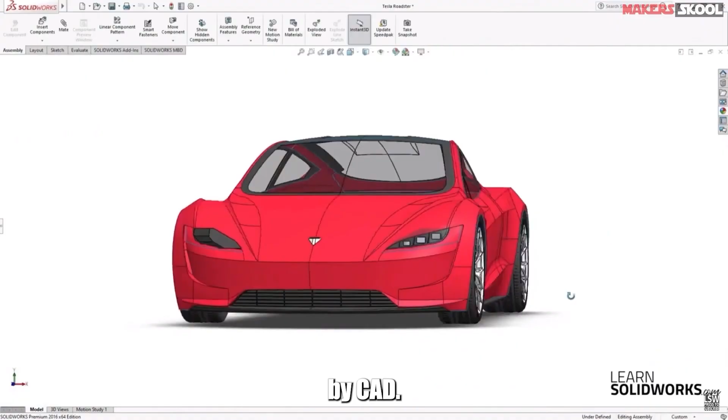But nowadays, for the last 40 years, all designs use CAD. Modern aircraft are designed by CAD. Modern cars are designed by CAD. iPhones are designed by CAD. All modern products are designed in CAD. All the products all around us are designed in CAD. So we still do design, but we have computers to help us, aid us.

So CAD is Computer Aided Design. Computers help us, aid us to create design or create any model that we can imagine. Who uses CAD?

Aerospace engineers use CAD. Aerospace engineering is about building things that fly through air or space. The use of CAD in the aerospace industry is vital for the successful creation of innovative airplane designs and functionalities. Using CAD, the airplane can be designed and tested on the computer to see how air will flow over the wings. The engineer can know how the plane will react to variables like ice, snow, or turbulence without endangering people.

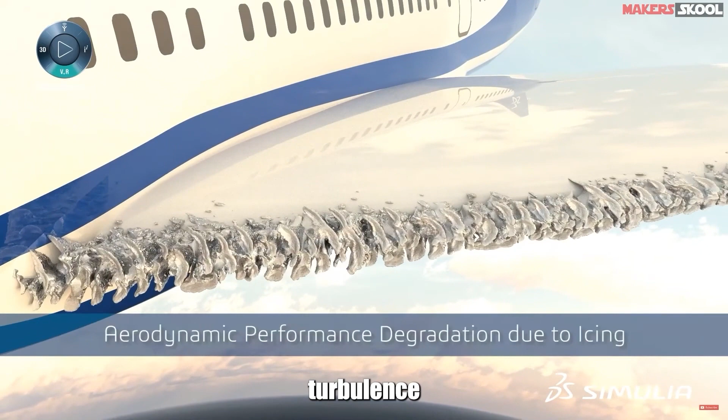CAD is used by NASA to design all components for the International Space Station and space flight. Structural engineers use CAD to see how strong buildings and bridges are. They can use it to test the strength of materials to see how strong it is before building something out of it. Biomedical engineers develop everything from life-saving ventilators to CAT scan machines to prosthetics or medical implants such as pacemakers.

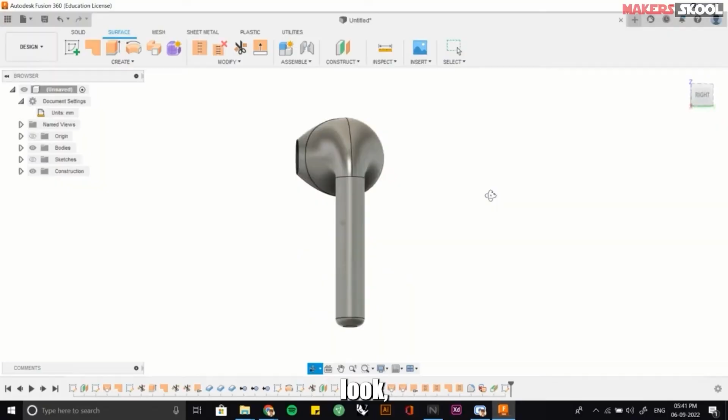Electrical engineers use CAD to design computer components, used in everything that has a computer in it such as phones, cars, refrigerators, TVs, and smart devices. Industrial designers use CAD to see how all our products look, feel, and interact with us. Furniture designers use CAD to create plans for kitchens, cabinets, chairs, tables, etc.

Interior designers use CAD to lay out the space of a building. They could show the owner different designs so they know what it is going to look like before committing to buying materials and furniture.

Architects use CAD to design buildings ranging from residential homes to shopping malls to huge skyscrapers.

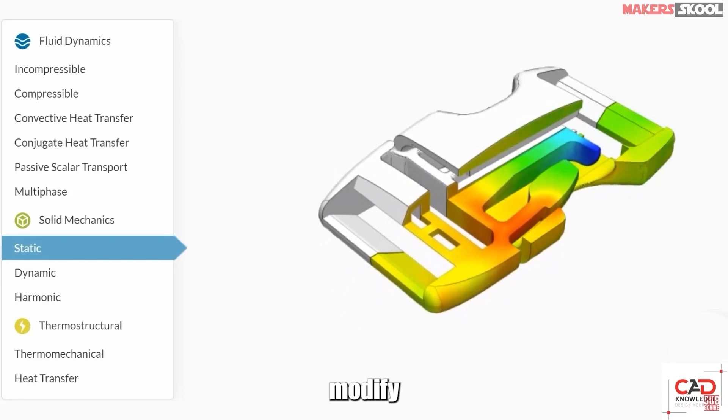Mechanical engineers use CAD to research, design, develop, and test mechanical devices. They can also make use of simulation to test everything from stress to vibration, getting the perfect output without having to create and modify real-world prototypes.

CAD has a wide variety of applications, from interior design to biomedical engineering to aerospace engineering, all using CAD. So then, when you design stuff, the next part is manufacturing. Manufacturing is making of things, it could be anything.

Fusion 360 can also do that. With CNC machining, laser cutting, and 3D printing, the design model can be turned into a real life product.

So let's understand what CAM is. CAM stands for Computer Aided Manufacturing. Similar to CAD, the computer helps us in the manufacturing side of things, meaning Fusion 360 can control manufacturing by controlling CNC, laser cutting, and 3D printing. So CAD focuses on design of a product, whereas CAM focuses on how to make it.

With the help of Fusion 360, you can create anything you want, whether you want to solve any normal household problem or create a product that changes the world. With Fusion 360 and 3D printing, you can turn your idea into reality.

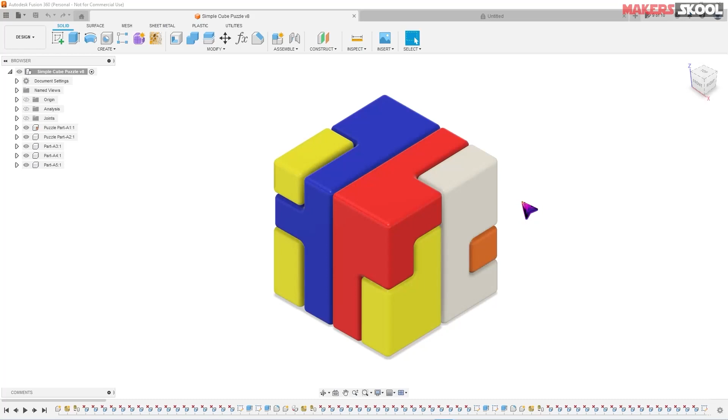Hi everyone, this is our first project that we are going to make. It's a simple puzzle cube. So before getting started, make sure that our settings are all the same.

For that, just right click on the top icon and click on preferences, then click on restore the default. In this course, we are using millimeter as our unit, but you can use any other unit you want. Then click OK. You can also change the unit by clicking the arrow beside document setting and then clicking this icon, which lets you change the unit if you want.

Hi, this is our first project, so let's start creating it. To create a new design or new project, you can click on the top right plus icon, or click on this icon and create a new design.

To create any 3D model, we first have to understand and master 2D drawing or 2D shapes. So what's a 2D drawing? Any drawing or shape that has only length and breadth is a 2D drawing. When we add height to a 2-dimensional drawing, it becomes a 3-dimensional shape.

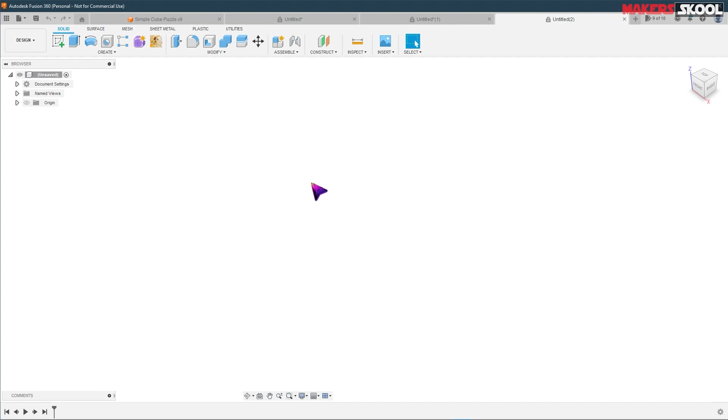In order to create a square, we have to create a sketch. To create a sketch, just click on the top left icon, and this will open up various planes where we can create the sketch. A sketch is basically where we draw 2D drawings. These are the various planes where we can draw them. This red line represents the x-axis, and this blue line represents the z-axis.

This cube is the view cube. You can rotate it around by holding down the left mouse button and clicking it around. The green line represents the y-axis. So the bottom plane represents the xy plane, this plane represents the xz plane, and this plane represents the zy plane. We can create a sketch in any of these planes.

So for starting out, let's choose the bottom plane.

This opens up the workspace to create the 2D drawing. As we've seen earlier, this line represents the x-axis and this line represents the y-axis, as you can see in the view cube, and this point represents the origin.

To create a square, just click on the 2-point rectangle button, then click anywhere and drag it around. Then we have created our first square, and click on finish sketch.

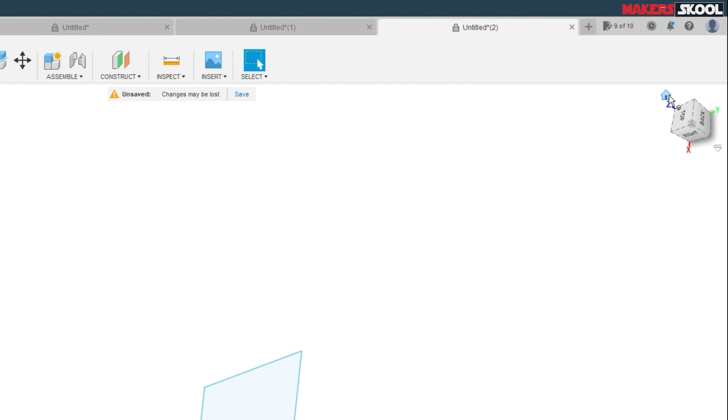To see the normal view, just click on the home button beside the view cube. And to zoom in and out, just scroll the middle mouse button of the mouse. You will be able to zoom in and out.

How do you think we will create a cube out of a square? As we have seen, we have to add height to the 2-dimensional drawing to create a 3-dimensional cube.

To create a height, we use a feature called extrude. Just click on it and then drag it up to create a positive height, and then click OK. The 2-dimensional square is being converted to a cube.

Now let's understand the basic navigation. As we've seen earlier, scroll the middle mouse button to zoom in and out, and hold down the middle mouse button to pan around the view. To rotate around the view, we can use the view cube, or click the shift button and then click the middle mouse button to rotate around the view.

When you zoom in or zoom out of the model, you can return to its normal view position by double clicking the middle mouse button.

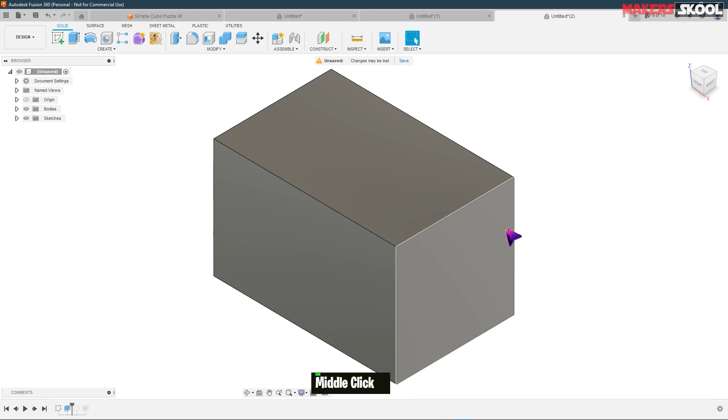Or when your model gets lost somewhere and you can't find it, you can find the model by double clicking the middle mouse button. There is another way to rotate around the model, by clicking on this orbit icon.

You can hold down the left mouse button to orbit around the model. You can get rid of the orbit icon by clicking the escape key on the keyboard.

You can also pan around by clicking on the hand icon and panning around, and you can get rid of the hand icon by right clicking the mouse button and clicking OK or cancel.

Let's move on to the next shape, for example a cylinder. So let's think in terms of its 2D shape. Yes, it's a circle. Similarly, we have to create a circle.

In a similar way, just click on the sketch button, create a sketch, and choose the bottom plane. Then choose the center circle, pick any point and drag it around, and then click on finish sketch.

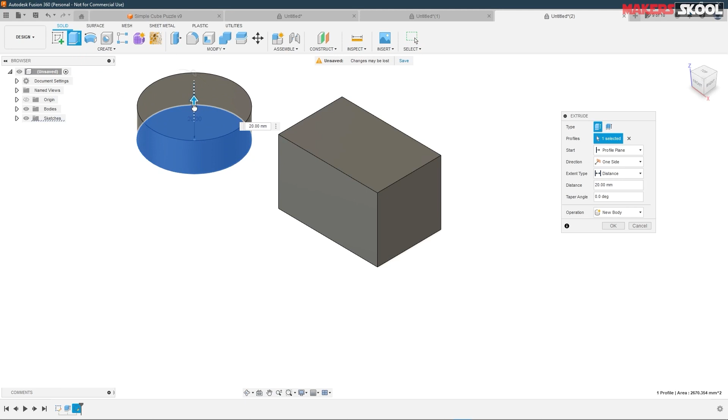In a similar way, we can add height to a circle to convert it to a cylinder. We use the extrude function again, and we can drag it up to add a positive height, or drag it down to add a negative height, as represented by the negative sign beside the number. Then click OK. We have created our cube and cylinder.

As we've seen earlier, we can create a sketch in any of the three planes. But a sketch can also be created on a flat face, any flat face on the cube or the cylinder. For example, let's take the top surface of the cube and click on it.

Now we are creating the sketch on top of the cube. Let's take a circle, click a point and drag it, and then click finish sketch.

Now you can extrude the circle on top of the cube. Just click on the extrude function, then click on the top circle sketch, drag it up, and click OK.

The sketch can be created on any flat face of the cube and the cylinder, but it can't be created on any curved surface. It can only be created on a flat face, not on the curved surface of the cylinder. This is the important concept.

So from the next video, we will start creating the first part of this cube puzzle.

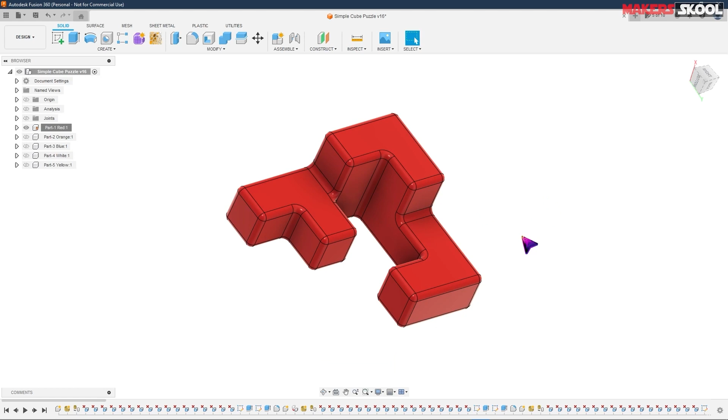It's a 2D drawing. First we are going to create this shape in the 2D sketch, and then extrude it till here. In the second part, we are going to create another sketch on top here, and extrude it here, as we are going to see next in the video.

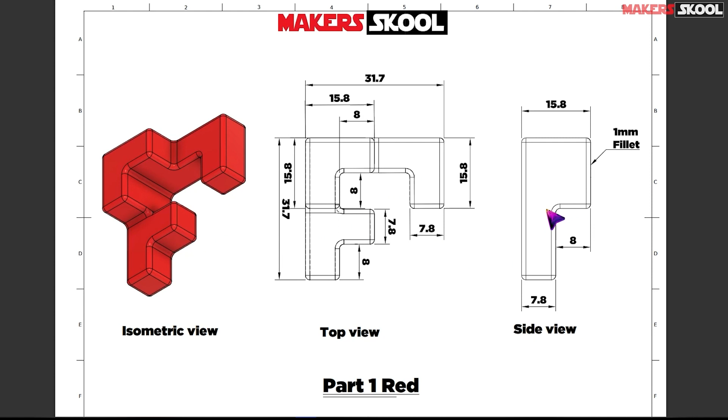This is the first red part that we are going to make. This is the drawing, the bottom sketch, and this is the side sketch that we are going to use. So let's start creating our design.

For that, click on new design, and before doing anything, first save the file. Just click on the save icon, and then give the name of the file. I am going to name it cube puzzle.

Then in location, choose the drop down icon, click on new project, and name it anything you want. I am going to name it Learning Fusion 360, then click enter, choose the new project we created, and inside that create a new folder named project 1. Then inside that we are going to save our cube puzzle and hit OK.

Now next we are going to create a new component. A new component is also known as a new part. As the cube puzzle consists of different parts - the red, yellow, orange and blue parts - these are different parts that make up our cube puzzle.

These parts are also known as components that we are going to use. For now, just click on new component. We will see components in detail in a future video. For now, name it part 1 red and hit OK. This will create the new part.

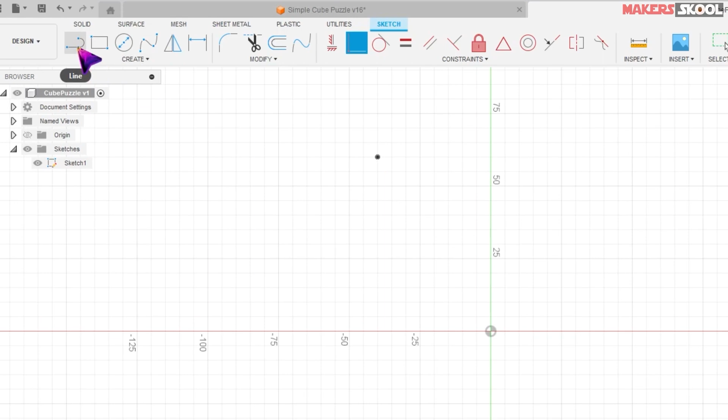Let's see some other examples. To create a line, click on the top left icon, the line icon, click once, drag it, and click again. You can continuously create another line, but we want a single line. To get rid of this, you can see this green tick icon - just click on it and it will get rid of that line.

Now we can use the coincidence constraint between this point and the line. If we apply the coincidence constraint between this point and the line, it will coincide with each other. Now it has coincided - the point has coincided with the line. If you want to get rid of the coincidence constraint, just click the escape key on the keyboard.

Now the point is coincident with the line. If you move the point, it will always be along the line. If you extend the line infinitely towards both sides, the point will always follow that line towards both sides. That is the coincidence constraint - it will follow along and coincide with this line.

In the same way, we can apply the coincidence constraint between two lines. We will create two lines - one line, click the green tick icon, then create another line and click on it. Now we can again use the coincidence constraint, this time between the point of a line and another line.

Just click on the point of a line and then click on another line. Now you can see that this line will follow that line along the line. If we extend this line towards both sides infinitely, then this line will always follow that line - it will always coincide with that line. This is the coincidence constraint.

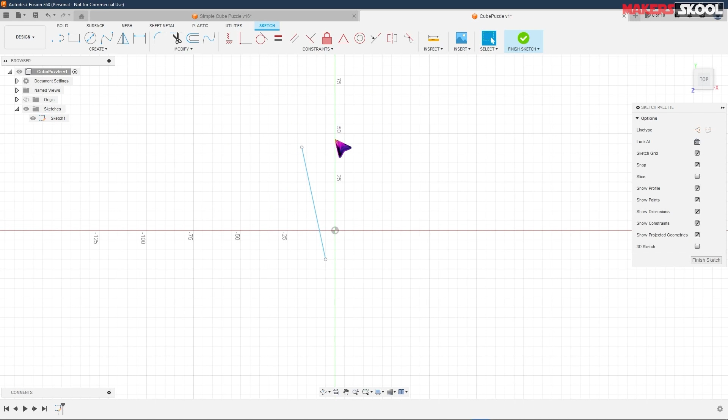Now you can see this line. You can rotate it around in 360 degrees, but we are using constraint to limit its movement. Constraint limits the movement of any shape, any line, any point, angle, or arc that we create - we have to restrict its movement. That's why we use constraint. So in this line we can rotate it in 360 degrees.

So if we want to restrict its movement along one axis, along the horizontal or the vertical axis, we can use the horizontal and vertical constraint. If we click on this icon and apply it horizontally, it will get horizontal and vertical constraint. Now you can't rotate it 360 degrees - the line has become restricted to the vertical axis.

In a similar way, if we align a line closer to the horizontal axis and apply a constraint to it, the line will become aligned to the horizontal axis. Now you can't rotate this line anymore. This is the horizontal and vertical constraint. If you want to know which constraint has been applied, you can click on this icon - here you can see it has used the horizontal constraint. Similarly, if you click on this other icon, you can check which constraint it has used - it has used a vertical constraint.

So let's move on to the next constraint, that is the perpendicular constraint. Similarly, we will create two lines. Now we can use the perpendicular constraint between these two lines. If you apply this perpendicular constraint between this line and this line, you can see this icon on both of them - that is the perpendicular sign, meaning both are perpendicular to each other.

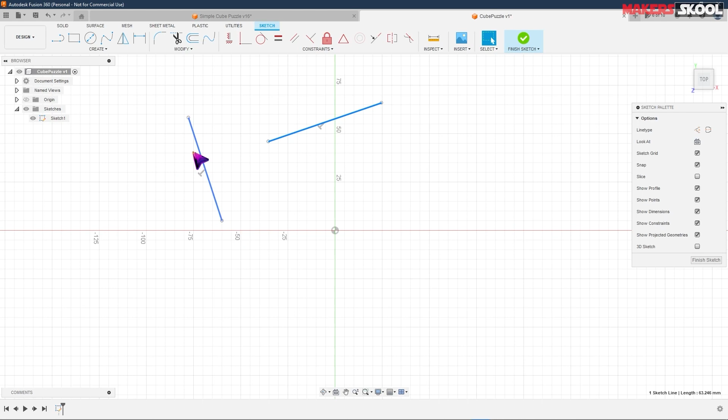That's the perpendicular constraint. If we want to align this line together, we can use the previous coincidence constraint, using the point and the line, then both points. Now you can easily see that both lines are perpendicular to each other. If we rotate it, it always remains perpendicular - this line and this line always remain perpendicular. That's the perpendicular constraint, meaning the angle between these two lines always remains 90 degrees.

You can check the perpendicular constraint by clicking on any of these two icons, and then you can check here which constraint it has used - it has used the perpendicular constraint.

So let's move on to the next constraint, that is the collinear constraint. Collinear constraint means if we create two lines, one line and another line, and we use a collinear constraint, then this line and this line will align themselves and become a single line, always following a single line, aligned in a single straight line.

Now that we've applied the collinear constraint, the line has aligned in a particular direction, becoming the same line. If we create another line and use a collinear constraint, meaning both lines - if we want this line to align with this line - we can use the collinear constraint. Just by clicking on one line and then another line, this third line has become collinear, meaning it follows the same straight line. This is the collinear constraint.

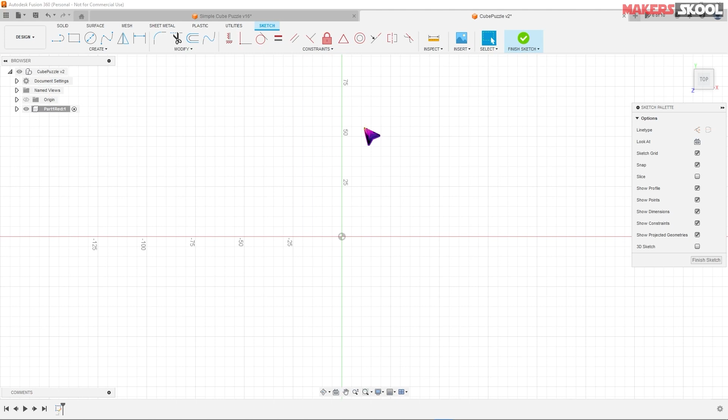So let's start creating our main sketch that we discussed, the part 1 red sketch. Open up that PDF - as you can see, this is the sketch we are going to use. We will create the basic structure of this sketch in the first part. This is the top view. So to create the sketch, just click on the line tool and create the basic structure of that part.

It can be a rough sketch. Now moving on, before using the dimension tool, we first have to use the constraint tool, so this line we can use the horizontal and vertical constraint on it.

As you can see, Fusion 360 has automatically allocated the different constraints - the perpendicular constraint, the vertical constraint, and the horizontal constraint. We don't have to use the perpendicular constraint now.

This line and this line are along the same line, so we can use the collinear constraint here, by clicking on this line and then clicking this line. Now you can see both lines will follow along - we have used the collinear constraint.

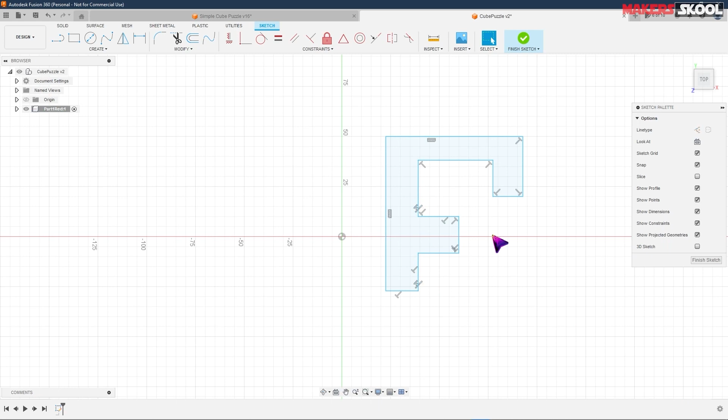If you click on this icon, it will show the collinear constraint. And if you want to get rid of any constraint that you don't want, click on the constraint icon and then click delete. Then you'll be able to get rid of that icon.

So we want that, so we can undo that using basic Control Z to undo things. Now we've basically used all the constraints that we can use. Now we can use another function, that is dimension, to dimension each and every line.

Now you can open up the PDF. We can use this dimension tool given here to dimension our sketch. These are all in millimeters. So we use the dimension constraint to dimension this line - this is 31.7, and then hit enter.

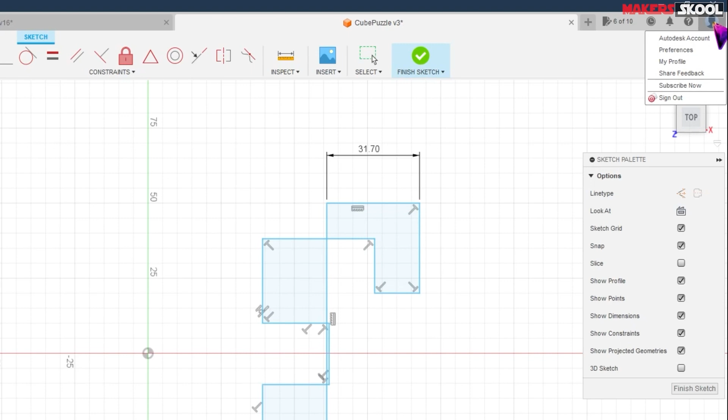But you can see that the shape has been distorted and the shape can't resize. For that we have to change some setting here. Click on the top right icon and then click on preferences.

Inside preferences, go to general, and in design you will see a setting for 'scale entire sketch at first dimension'. Click on that, then click apply, then OK, and then undo this step where we gave the dimension, and click delete this.

Now use the dimension sketch again, enter 31.7, and hit enter. Now you can see the entire sketch has been resized according to this dimension. That was the setting we changed.

Now you can give dimension to each and every length. Now we can use another constraint, the equal constraint, to constrain this sketch. We know that this length and this length are equal, so we can use the equal constraint on them. Now we don't have to dimension this length.

In the same way, this and this are all equal, so we can use the equal constraint here also between this and this length. Now these three have become equal. Similarly, we can use the equal constraint between this and this length.

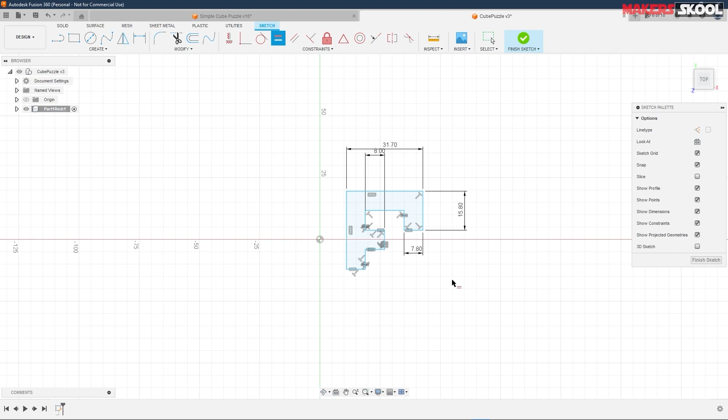This length is 8. These are all also equal - this length and this length are equal. Now we have to dimension only one part, this one. This and this length are also equal.

So here we can use the coincidence constraint between this point and the origin. Now you can see the color of the sketch has changed - now it's black. This indicates that we have fully defined the sketch, or fully constrained the sketch.

You can see by the lock icon beside the sketch that it has been fully defined. Now you can't move any of these points. This all indicates that the sketch has been fully defined - that's our aim.

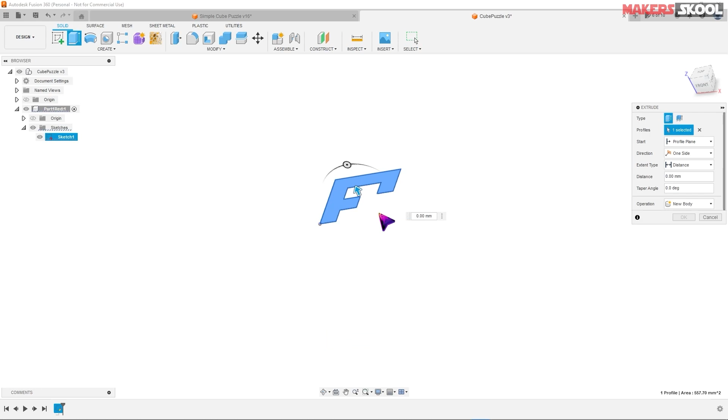That we have constrained, then click on finish sketch. Now rotate this icon and we have to extrude this sketch by clicking on this extrude icon, or just clicking on the plane and then right clicking and clicking on the extrude button.

What is the dimension of the extrude? You can check it from here. This is the length, 7.8. We have to extrude, then enter 7.8 and hit enter. So we have created the bottom part.

This part we have created. Now the next part left to create is the top part, so we have to create the sketch for that, on top here. So open up this sketch. To create this top part, we have to create this sketch.

So we have to create the rough sketch first, on top of here. Select the top face, then right click and select create sketch. Now we have to create the rough sketch that we have seen. To create the sketch, just click on the line tool, click on one point, and create the rough sketch.

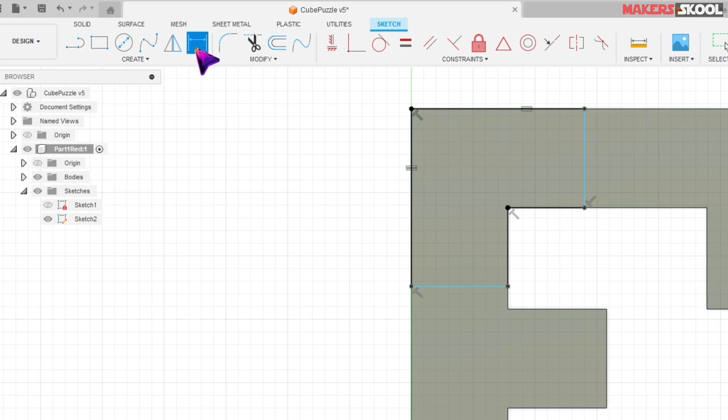Now the next part is to use the sketch dimension. So we will dimension the top length, which is 15.8, and then hit enter.

Now you can see again that the sketch has turned, all the lines have turned black. This shows that the sketch is fully constrained, as you can see from the lock icon. If you delete this dimension, now you can see the lock icon has gone, which indicates the sketch is not fully constrained. So the lock icon indicates the sketch is fully constrained, and that's what we want. Then click on finish sketch. Now go to the normal view by clicking the home icon.

Now we have to extrude it. Click on the sketch, then right click and click on extrude. Extrude it up to see what the extrude value should be, which is 8mm, give it 8mm and hit OK. Now you can see the part we have created. This part we have already created.

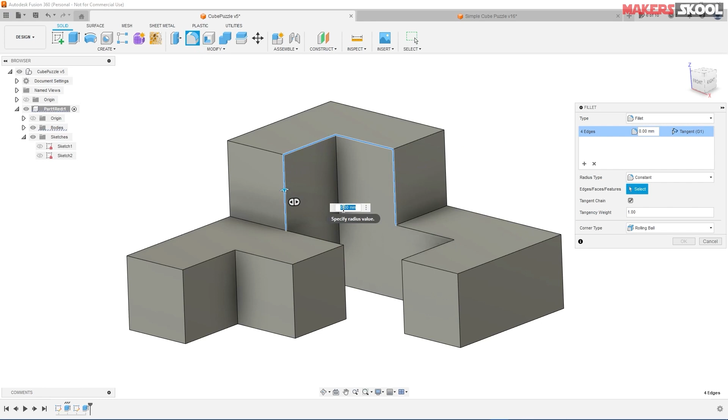Now the only thing left is to round off the edges. To round off the edges, we will use a tool known as fillet. If you click the edges, multiple edges, and give it, for example, 1mm of fillet, it will round off the selected edges. But in this part, each and every edge has to be selected individually to round off. So we can do the fillet again by clicking individual edges, or there is a shortcut we can use. We can undo this fillet with Ctrl+Z.

To select every edge, go to the top icon, select, and go to the selection filter, make sure select through is ticked, deselect select all, and then select body edges. Now hold down the left mouse button and drag it, making sure the square covers the whole body, then let it go. Now you can see every edge of the body has been selected.

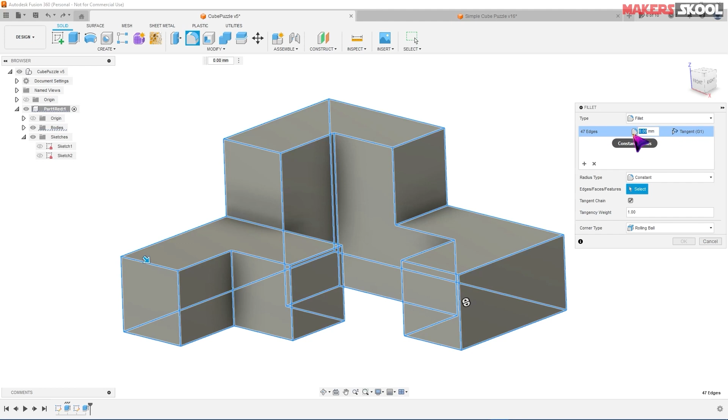Now we can go back to the fillet. You can see that all 47 edges of the body have been selected. Now we have to give the fillet of 1mm, and then click OK.

Now we have created our first part. The only thing left is to color it red. To color it, select part 1, right click on it, and go to the Appearance option.

This opens up the Appearance dialog box. Go to the library section, and inside library select the plastic folder. Inside plastic we can see different types of plastic, but here we use ABS white plastic. Click on it and drag it over the part, and now you can see the color of the part has changed.

Now we want the red color, so to change the color, go to the ABS white icon, right click on it, and click Edit. You can drag this to change it to red, and then click Done.

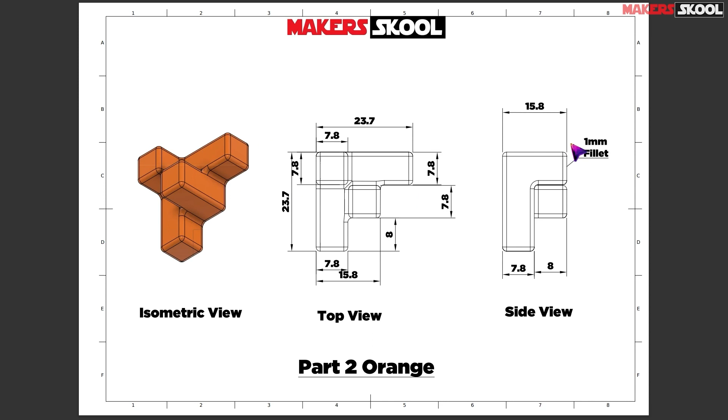Now we have created our first part. The next thing I want you to do is make part 2 orange and part 3 blue, using the sketch and the same concept discussed earlier. I'll give you some hints: start with the sketch, extrude it up, create another sketch on top, extrude it again, and add the fillet. In similar fashion you can create the blue part also. These are easy, you can do it.

Before moving forward, remember we selected the selection filter earlier. Make sure we select all again.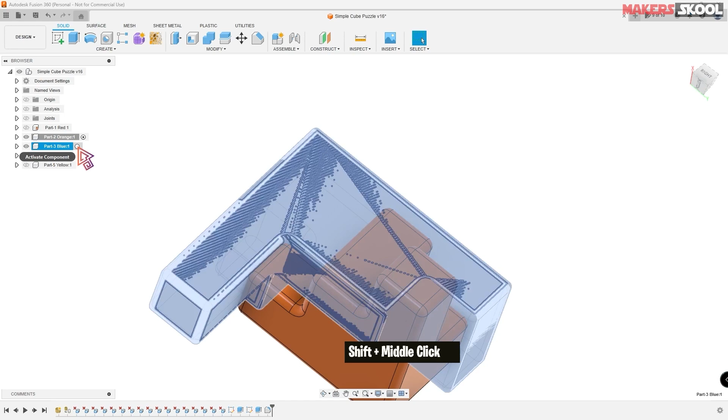In the previous video we created part 1 red, and I gave you the task to create part 2 orange and part 3 blue. Hope you tried to make it yourself. For those who got stuck, I'll give the solution for part 3 blue, and I recommend even those who completed part 2 and 3 to watch this video, as new concepts will be given here.

To create part 3 blue, open up the cube puzzle we created in the last video. Click the show data panel icon, go to the home icon, and inside all project files you'll see the Learning Fusion 360 file. Double click to open it, click on project 1, then double click on the cube puzzle to open it. To create part 3 blue, click on new component and name it part 3 blue.

Hit enter. Now you can see the new component has been created with the name part 3 blue, and this is the previous part 1 red we created. To hide part 1 red, just click on the eye icon.

Let's start by creating the bottom sketch. Click on create sketch and choose the bottom plane. Then open up the PDF drawing of part 3 blue. This is the bottom sketch of part 3 blue, so we try to make the rough sketch of this bottom plane.

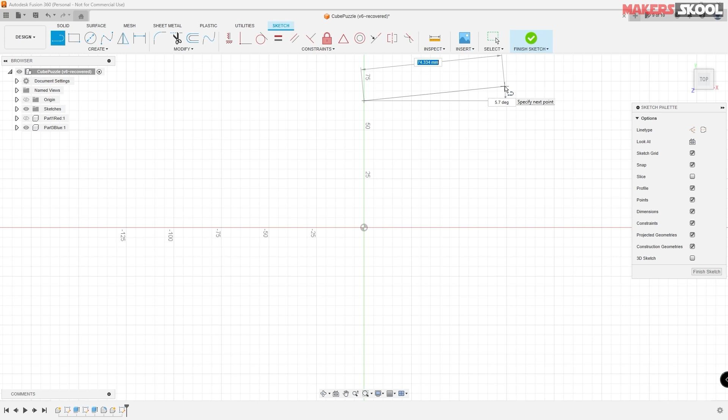Choose the line tool and create the line. If you try to make the line straight, you can see by the blue sign indicated on the line that the horizontal constraint is being allocated to it. If you try to make it at any angle, the horizontal constraint is gone. In similar fashion, if you make the line straight at an angle to another line, you'll see a 90-degree angle being allocated. If you make it at any other angle, the 90-degree angle is gone.

If you try to make the line straight, you can see the perpendicular constraint is being allocated to it. In similar fashion, as we try to make lines straight, Fusion 360 will automatically allocate a constraint to that line.

So now we have created the rough sketch. To get rid of the line tool, just click the escape key on the keyboard, or click the right mouse button and select OK or cancel. There are two ways to cancel that out.

So now the next step is to fully define the sketch. That's our aim in the sketch workbench. What does it mean to fully define the sketch? As you can see, the sketch is now freely able to move in any direction. That we don't want. We want the sketch to be fixed so it can't move anymore. To achieve that, we use the constraint tool and the dimension tool to fully define the sketch.

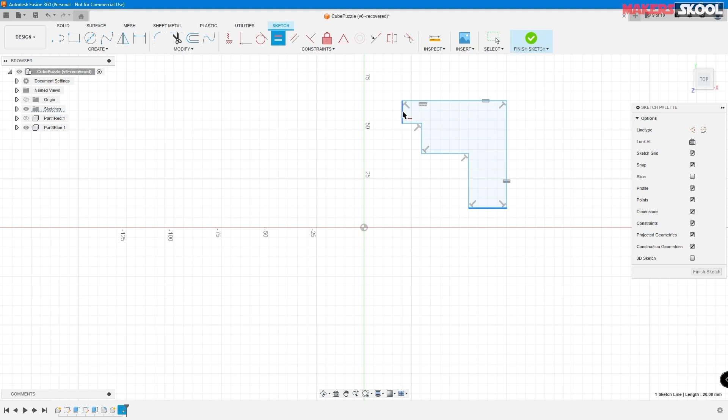So we will start by choosing the constraint tool. We can use the equal constraint here. As you can see, this length and this length are equal at 31.7. In similar fashion, this length and this length are equal, and this length too. So we use the equal constraint: this length and this length are equal, this length and this length are equal, this length and this length are equal. Then click escape.

Now we can't use any more constraints here. I think we have used all the constraints possible in this sketch. So we next move on to use the dimension tool.

So we dimension this length. What is that length? That length is 31.7. Enter that, then zoom in, and this length is 7.8. In similar fashion, this length is 15.9, and this length is 8.

When you try to make that length equal to 8, it shows that the sketch is over constrained. This means the sketch has already become 8 - you don't have to make it 8 again. You can see the sketch has already become 8 by the driven dimension. Then click on driven dimension and you can see the sketch length is 8. The driven dimension is for reference purpose only - it means this dimension is not driving the sketch, it's just measuring this length, shown by the bracket inside the 8.

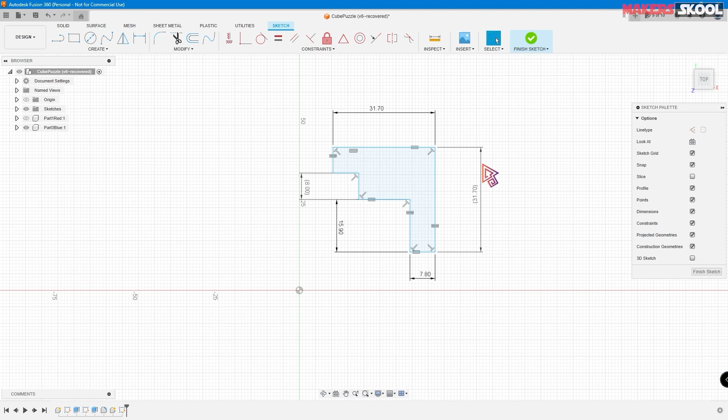Now when you try to move the sketch, you can see it's still movable, so we have to fix that. We have to fix this movement with respect to the origin. So we can use the coincident constraint between this point and this point. As you can see, the sketch has now turned black - that's our aim, to make the sketch fully constrained. Now the sketch can no longer move at any point.

That's what I was talking about. So why do we need to fully define the sketch? If we don't fully define it, and try to make changes in the future, it might break the model or throw off the sketch. So we need to fully define the sketch, so in the future we can easily make changes to the sketch or model without breaking it or throwing it off.

Then click finish sketch, then click the home button. Now we have created the 2D sketch. How do we create a 3D shape out of the 2D plane? We have to extrude it out, extruding it up. What is the length? 8.

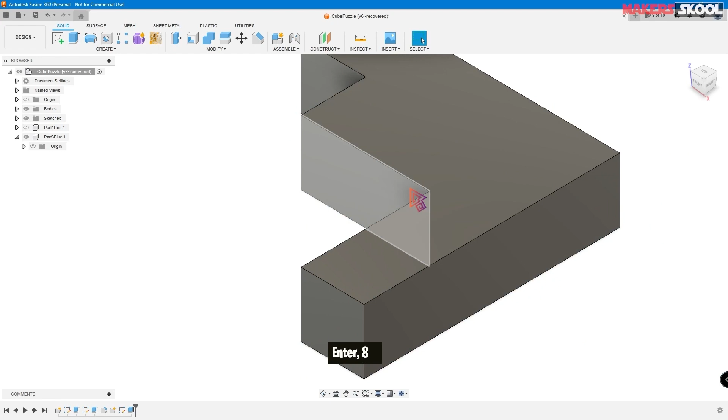So now we have created the bottom part. Next we have to create the top part, this top part. So this is the sketch of this top part - we have to create this rough sketch first. To create the sketch, we need the top surface here.

Just right click on it and click create a sketch, then choose the line tool again. We try to start the line from this point. You can see that when you move the cursor near the point, Fusion 360 tries to snap it to that point. In similar fashion, it snaps to that end point. Then we can create that rough line.

So we can create another line in similar fashion - it snaps to this point, and then again. To get rid of the line tool, just click the escape key.

So now we have to use the constraint first. We can use the equal constraint between these two lengths as they are equal.

As you can see the squares are already turned black. So we will choose to dimension this length.

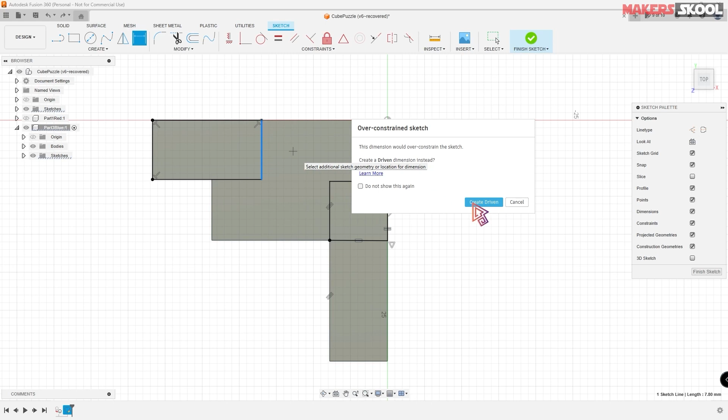Again the sketch is showing that this length is already defined, so we don't have to define it, as shown by the sketch being over constrained. You can check it out by clicking on create driven dimension. So we don't have to define this length as 7.8, as it's already been defined.

We only need to define this length, which is 15.9. So we have fully defined these two lengths, and now we can click Finish Sketch.

Now the next part is similar. Just click on the extrude tool and then click the extrude button. Here you can choose multiple extrude profiles all at once, so choose extrude profile 1 and the second. Both are selected, and then we can drag it up and add the length of 8.

And then hit enter. Now we have created our part 3 blue. Only thing left is to round off the edges, which is done using the same tool we used earlier, the fillet tool.

If by mistake you select any faces, you can click on the remove select icon. To select each and every edge, go to the selection filter, unselect select all, and then only select body edges. This means we are trying to select only the edges of the body, and the select tool will try to select all the edges.

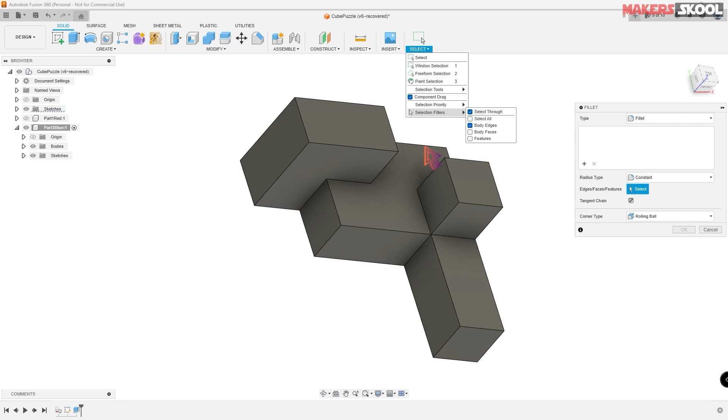Then click on one side and drag so that the complete body is covered. Now you can see that every edge has been selected, and we can add a fillet of 1 millimeter and then hit enter.

Now we have created the part. The only thing left is to add some appearance. Just right click on part 3 blue and then click on appearance.

We can go in a similar fashion. We will go to plastic, then go to ABS white, and you can download it. You can see this is the download icon. Download this ABS plastic and then right click on it and click add to favorite.

So when we use the ABS white plastic later on, it can easily be accessed from the favorite tool. Drag it over the tool, then right click on it, click edit, and change the color to blue, then click done.

Close that and then hit the save button, and then click OK.

So the next thing is creating part 2 orange. The first thing is to create a component, but before creating the component, make sure the cube puzzle is selected. Now click on new component and name it part 2 orange, then hit enter.

Now click on create sketch, choose the bottom plane, and hide part 3 by clicking the eye icon. Then open up the part 2 orange sketch and create the basic sketch of part 2 orange.

Choose the line, then click the escape key. Now use the constraint, the horizontal vertical constraint, and then use the equal constraint.

You can see this length and this length are equal, and this length and this length are equal. So we can make these lengths equal. Now you can see this length is 8, and this length is also 8, so both are equal. When you calculate the length of the bottom sketch, total is 15.8. Subtract 7.8, you get 8, and similarly 8 here. That means this length, this length, and this length are all equal.

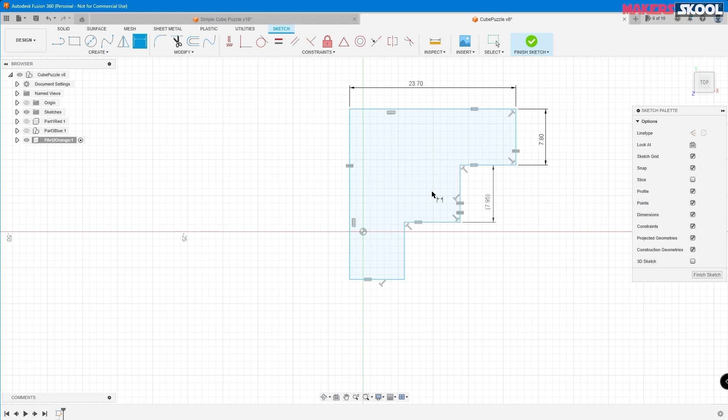Now you can click on escape key. Now you can't able to select because we have made the selection filter, but we have not made the selection filter to all, that's why we couldn't select before. Now we can select easily, and now we can move it.

Similarly, we can make this and this point a coincident constraint, or we can directly move the point over the origin, and it will automatically add the coincident constraint. Now the sketch has turned black. Now we can click on finish sketch and then click on home, and extrude the plane, which is 7.8.

Now the next thing is creating this top sketch. We will right click on it, then click on create sketch, choose the line tool again, and create a basic rough sketch, similarly over here.

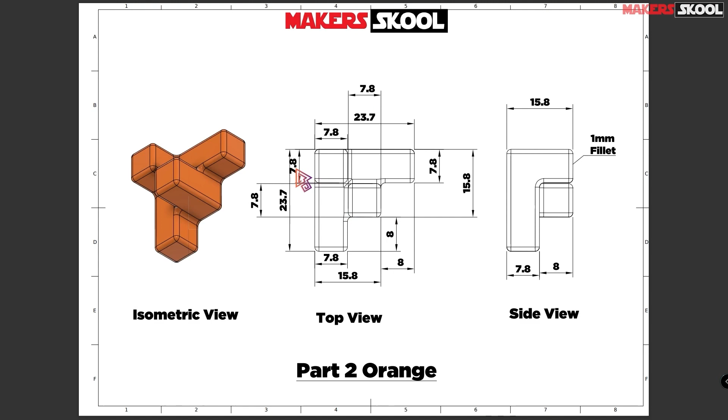Now next we can use the equal constraint. We can see that the top length of the sketch is 7.8, and this is also 7.8, meaning both lengths are equal. Similarly, this and this length are equal, so we can make this and this length equal, and this length equal.

Now the next thing is adding the dimension, which is 7.8, and this is also 7.8. Now we have fully constrained the sketch.

Now next is finish sketch, and similarly we will extrude it. Select the first profile and then select the next profile and extrude it till it, making sure that the operation is join, and then click on OK.

Now the next thing is adding the fillet. So we can again move to the selection tool, then the filter, deselect the select all, and select the body edges, select all body edges, then go to the fillet and add 1 mm of fillet, and click on OK.

Now the next thing is appearance. Right click on the part 2 orange and then click on appearance. Since the pop-up hasn't come out visibly, but it is over here, you can go to the favorites and add ABS.

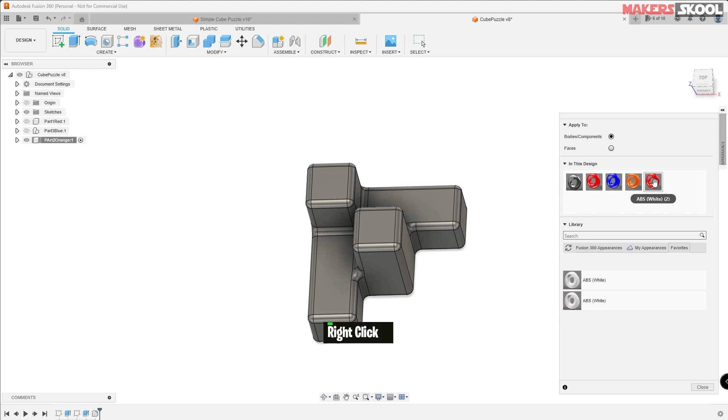You can click on any of the appearance and then click on duplicate. It will duplicate the same ABS file, and then you can click on the duplicate file and click on edit, and now you can change the color to orange, and then click on done. Now open the appearance again, drag the orange color over the part, and click on close. Now we have created the part 2 orange similarly, and then click on save the file.

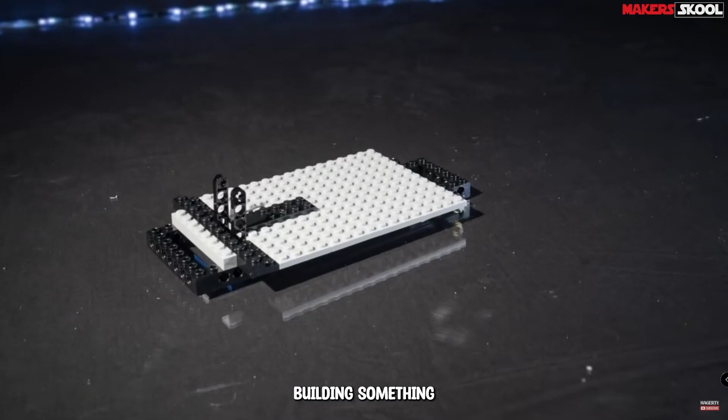What is 3D printing? 3D printing, also known as additive manufacturing, is a process of creating physical objects layer by layer using a special machine called a 3D printer. It's like building something with Lego bricks, but instead of assembling the pieces manually, the printer does it for you automatically. Here's how a 3D printer works in simple terms.

First is design. You start by creating a digital design of the object you want to print. This design is made using computer-aided design (CAD) software such as Fusion 360, or it can be downloaded from online resources, for example Thingiverse. Second is preparation.

The digital design is then sent to the slicer software, like Cura, which prepares it for printing. This involves dividing the design into very thin cross-sectional layers, like slicing a loaf of bread into many thin slices.

Third is printing. The 3D printer starts with the bottom layer and begins printing from the ground up. It does this by depositing or solidifying material such as plastic, metal, or resin layer by layer. Each layer sticks to the previous one, gradually building the object.

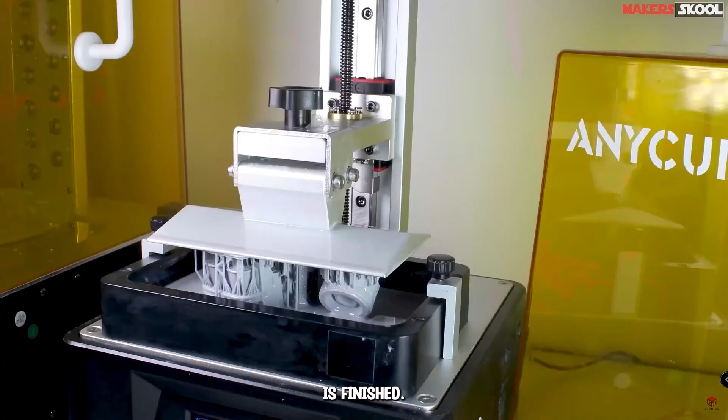Fourth is finishing. Once the printing is finished, you may need to remove any support structures that were used during the printing process. Depending on the material and design, you might also do some post-processing such as sanding or painting to give the object a polished and refined look.

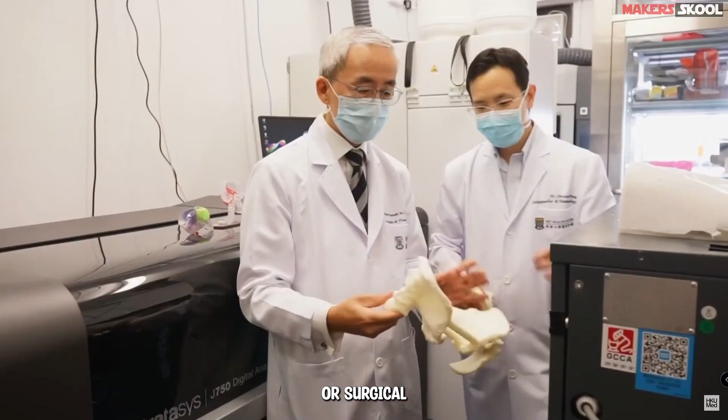Here are a few examples of where 3D printing is being used. Healthcare: 3D printing has made significant advancement in the field of healthcare. It is used to create patient-specific medical implants, prosthetics, and anatomical models for surgical planning. Surgeons can use 3D printed models to practice complex procedures and improve surgical outcomes.

Jewelry and fashion: designers and fashion enthusiasts leverage 3D printing to create intricate and personalized jewelry pieces, accessories, and even clothing. It offers the flexibility to design complex geometries and unique patterns that are challenging to achieve through traditional manufacturing methods. Art and design.

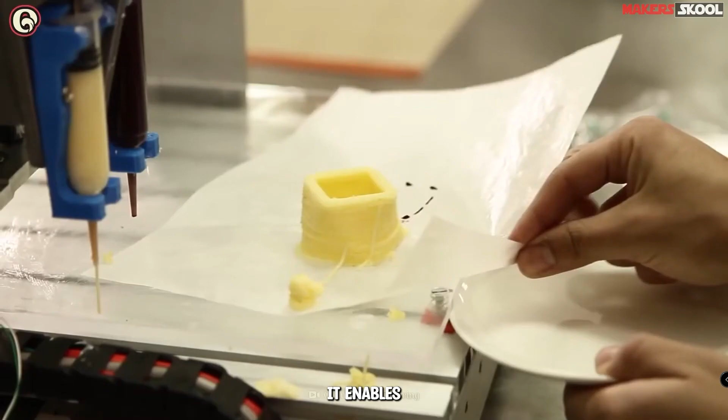Artists and designers explore 3D printing as a medium for creating unique and intricate sculptures and decorative pieces. It provides a new level of freedom and complexity in realizing artistic vision. Food industry: 3D printing is emerging as a technology in the food industry. It enables the creation of visually appealing and customizable food items such as chocolates, cakes, and confections.

Chefs and culinary artists can experiment with different shapes and textures, bringing innovation to the culinary world.

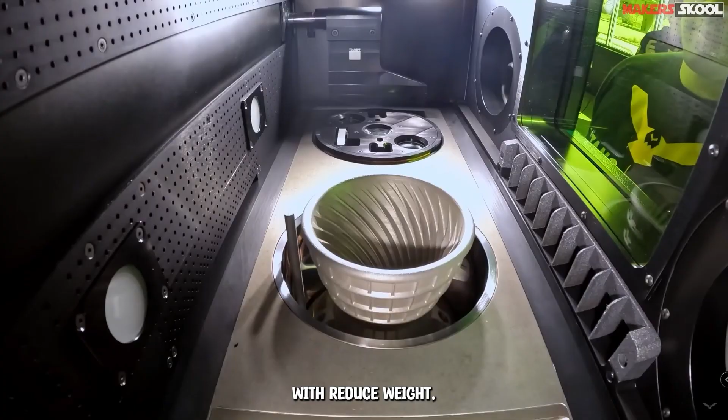Aerospace and defense industries use 3D printing to manufacture lightweight and complex components for aircraft, satellites, and missiles. This technology enables the production of intricate parts with reduced weight, improving fuel efficiency and performance.

Architects and construction professionals use 3D printing to create detailed architectural models, showcasing design concepts and helping clients visualize projects before construction. Additionally, 3D printing can be used to fabricate building components and intricate structures.

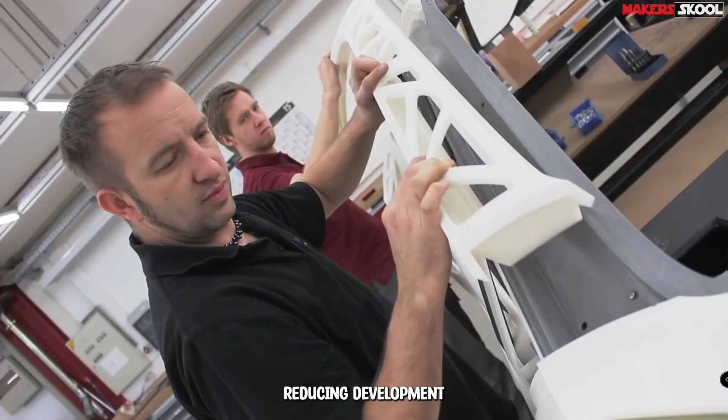In automotive industries, 3D printing is used for rapid prototyping of cars, parts, and components. It allows for faster design iteration and customization, reducing development time and costs. Some manufacturers are even exploring the use of 3D printing for creating end-use parts in production vehicles.

3D printing allows for great versatility and customization. You can create a wide range of objects, from simple toys and jewelries to complex prototypes and functional parts. It has revolutionized industries like manufacturing, healthcare, architecture, and more, enabling faster production, cost-effective prototyping, and the ability to make one-of-a-kind creations. Overall, 3D printing offers an exciting way to bring imagination to life, turning digital designs into physical objects with the help of a 3D printer.

In the previous video, we created part 1, part 2, and part 3. So the next thing is 3D printing this part. For this, we need to download slicing software that will make the part ready for 3D printing.

There are many different types of slicing software out there, like Ultimaker Cura, Prusa Slicer, or Simplify 3D. But in this course, we are using a free and open source slicing software, Ultimaker Cura. If you are using any other software, the concepts taught in Ultimaker Cura can be applied to any slicing software.

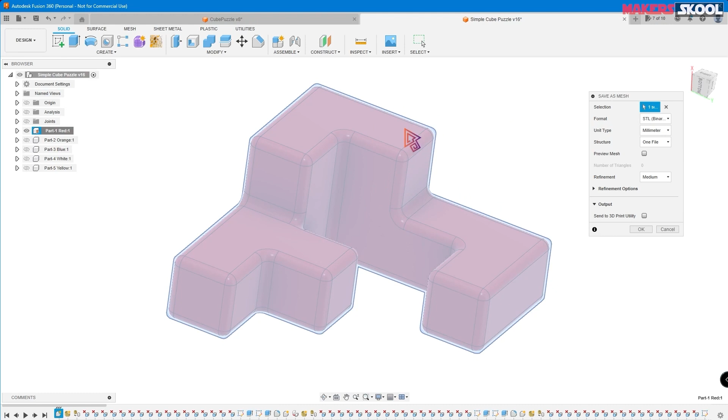So the next part is sending the 3D model for 3D printing. For that, right click on the part 1 red icon and click on save as mesh. This will save the 3D model as STL format, which is acceptable by the slicing software for 3D printing. Then click OK.

Then click on save to my computer. Click on here, then choose the folder where you want to save the STL file format. Name the part you want to save. In my case, I am saving it as part1 red dot stl, then click on save. Now click on save again. This will save the file on your computer as an STL file format.

Or you can directly send the part to the Cura slicer without needing to open the software. For example, take part 2 orange, right click on it, and click on save as mesh. Select the send to 3D print utility and then click on Cura.

If you have installed the Cura software to its default location, select that. If you have installed it at a custom location other than default, click on custom, then click on the folder, select from my computer, and choose the location where you installed the Cura software, then click open. In my case, I installed Cura to its default location, so I select Cura directly from here and click OK. This will open part 2 orange directly in Cura.

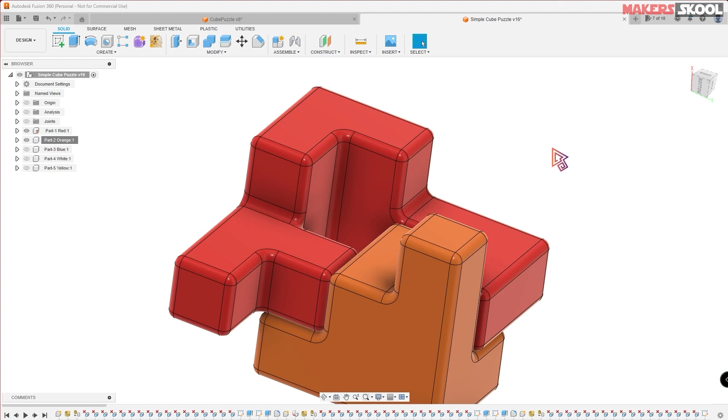For basic navigation in Cura: to rotate around the model, right click the mouse button, hold it down, and you can rotate it around. Similarly, you can zoom in and out by scrolling the middle mouse button. To pan around, click the middle mouse button, hold it down, and you can pan around the model. If the model is at the corner, you can move it by clicking on the model and then clicking on the arrow to move it around.

Next, you can sign into the Ultimaker Cura account to back up and sync your settings. So click on sign in.

If you already have an account, you can enter from here. If you don't have an account, click on sign up. Then enter your email ID, then enter your password.

Then click on next. Enter your name, username, first name, last name, date of birth, and your country. Then click keep me up to date, and then click on next.

If you have an Ultimaker or MakerBot printer, you can click on this, but I don't have one, so I will click here to sign in or backup the settings, etc. Then click on create account. Now you can open your email inbox to verify your email ID.

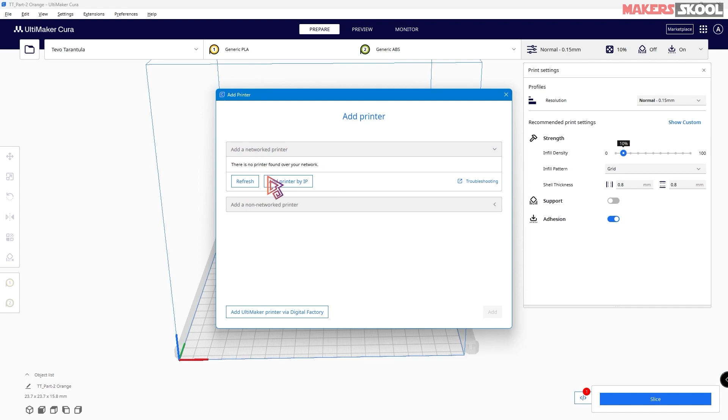Then add a network printer. If your printer is connected to the PC, you can check it from here. Or if not, you can click on add a non-network printer. Then search for the printer you have. I have the Tevo Tarantula, so I will select that.

After you have selected your printer, click on add, then click on manage printer, select the printer you have created, and then click on machine setting.

If you want to change any of these settings, like X length, Y length, or Z length, you can select from here. If you want to change the number of extruders, you can change it from here, and then click on extruder 1.

You can change the nozzle size and filament diameter from here. In most cases, the default is good. If you don't know the X, Y, Z length, you can Google the printer name and find it out, along with the nozzle size and the X, Y, Z length.

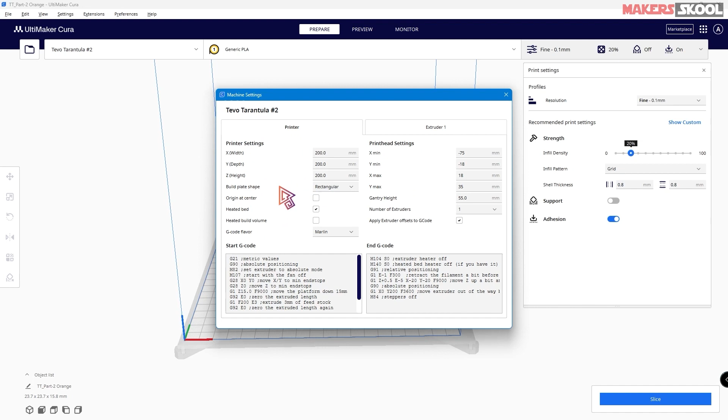The next thing is adding some plugins to enhance the functionality of the program. To add a plugin, click on marketplace, and the first setting you will see is the settings guide. If you don't see it here, you can search for it and then click on install.

After installing the plugin, you can see that it will explain each and every print setting in detail. If you don't see this setting, and instead see this type of setting, you can click on recommended setting. In a future video, we will go in detail into each of these settings. For now, starting out, just click on recommended setting to start with the basic and simple settings.

So what is slicing software? Slicing software is nothing but converting the STL file that we imported from Fusion 360 into many different layers. When we click slice and then preview, you can see that the model has been converted into different layers, multiple layers, which the 3D printer will print, as seen by the 78 layer total.

78 layers, different layers the 3D printer will print on top of one another. This is slicing. Slicing is converting the model into many thin different layers, which is used by a 3D printer in the format of G-code.

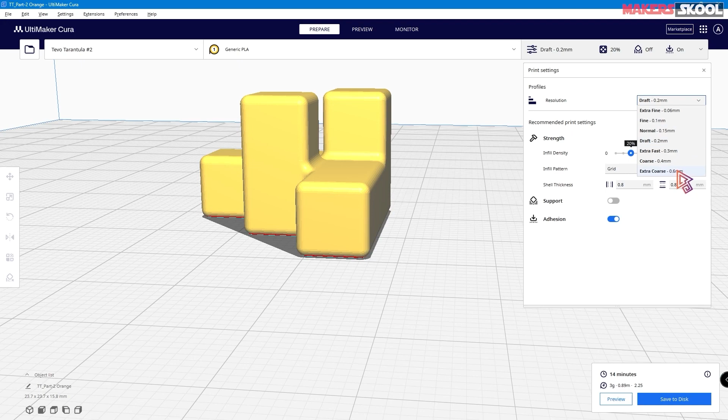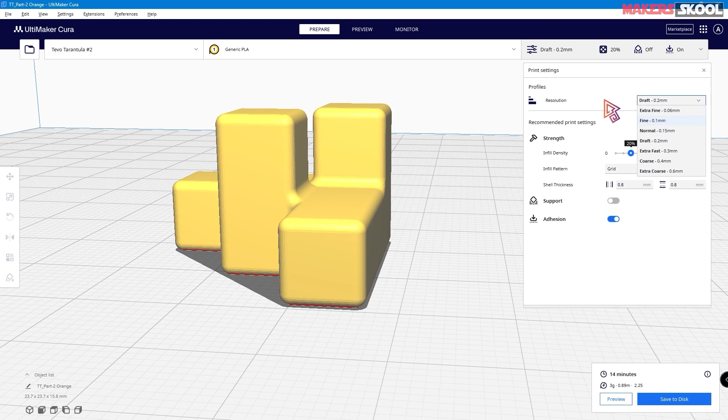The minimum layer height we can consider is 25% of the nozzle diameter. So 25% of a nozzle diameter of 0.4 is 0.1, which is the minimum layer height for a 0.4 nozzle. The maximum layer height we can consider is 75% of the nozzle diameter, which works out to 0.3. So the minimum layer height for a 0.4 nozzle diameter is 0.1 and the maximum is 0.3. This is the range we can vary the layer height within.

Varying the layer height changes the time duration of the printing, the strength, and the resolution of the print. At a lower layer height, for example 0.1 millimeter, the printer will consume more time, and vice versa, at a higher layer height like 0.3, the printer will consume less time.

For example, at 0.1 millimeter, if you slice it, you can see it will take 26 minutes, and at a higher layer height of 0.3, it will take 10 minutes. So it consumes less time, but with a con of lower resolution and lower strength. Vice versa, at a lower layer height, it has higher strength and higher resolution.

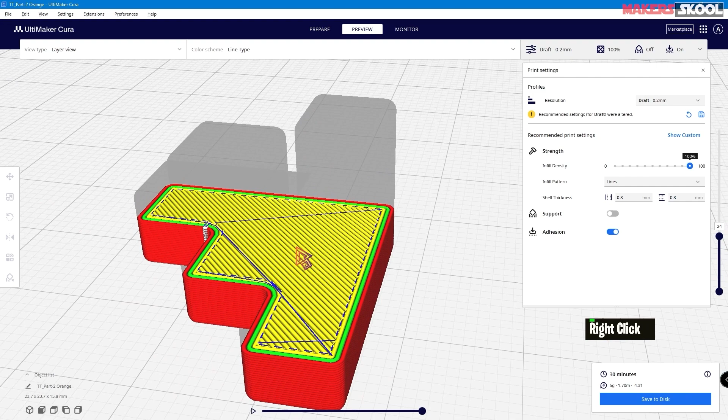For example, take 100% infill and then slice, then go to preview. Now you can see that the material is completely filled - 100% density. Infill density means there is no gap between the filament patterns; it's completely filled. Similarly, vice versa at 0%, when we slice it, you can see that there are only walls around there. 0% infill means no material used inside.

At 50% infill, there will be a 50% gap and 50% material will be used. So by changing the infill density, we change the filament used, time consumption, density, and strength. At lower density, it will consume less filament and less time, and will have less strength. Vice versa, at higher density, it will consume more filament, become more dense, consume more time, and have higher strength.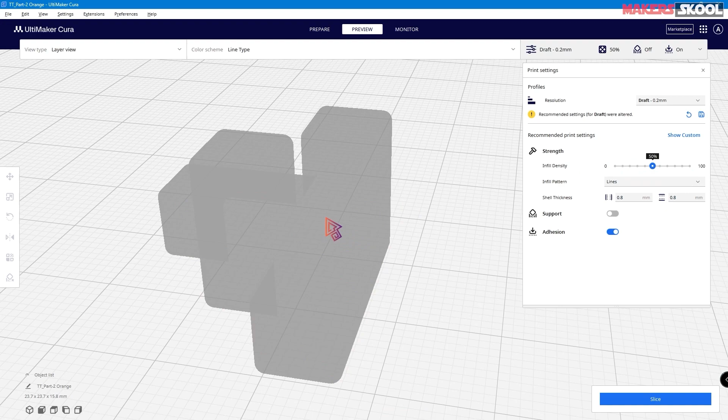For most of our cases, we can use from 10% to 50% for standard prints. In this case, we will consider 20%. So the next setting is the infill pattern - as the name suggests, this is the pattern in which the 3D printer lays out the infill.

As you can see, I have selected a triangular pattern, and you can see that the pattern inside is in a triangular form. Similarly, when we go to the line infill, you can see that the pattern is in line format, single drawn lines. In a similar way, each and every option has a different pattern available here.

The most commonly used patterns are line, triangular, or gyroid infill patterns. Changing the infill pattern also changes the strength and the time consumption of the print. For less time consumption with standard strength, we can use line or triangular infill for most cases. When we want a higher strength 3D model, we can go with a gyroid infill.

The next thing is wall thickness. So what is a wall? When you make the infill density 0, what's left without the infill density is the wall - you can also call it the shell or perimeter. So what is the wall thickness? The thickness of the wall is the wall thickness.

The wall thickness depends upon the nozzle diameter. As we discussed earlier, in a standard 3D printer the nozzle diameter is 0.4. So when the 3D printer starts printing a single line, the width of that single line equals the nozzle diameter - 0.4 for a 0.4 nozzle diameter. If it has a 0.6 nozzle diameter, then the line width will be 0.6. So the width of a single wall with a 0.4 nozzle diameter will be 0.4, and since there are two walls, the total width will be 0.8.

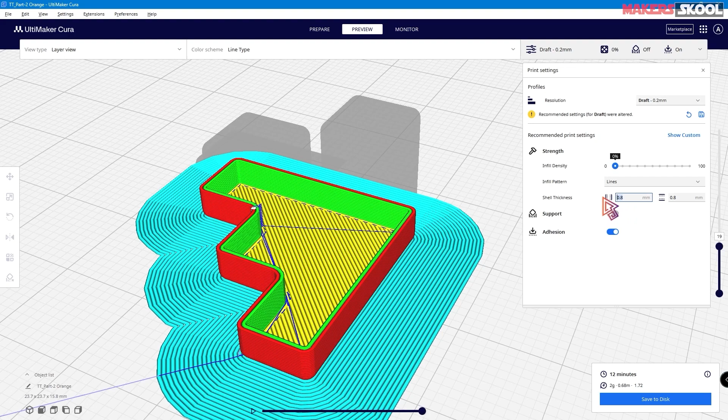As you can see, the shell thickness (wall width) is 0.8. If we want 3 walls, we multiply 0.4 by 3, which gives 1.2. By changing the thickness, we've changed the number of walls, so now it has 3 walls. Always keep in mind that the shell thickness must be a multiple of the nozzle diameter - if we want 3 or 4 walls, we multiply by the printer's nozzle diameter.

By changing the shell thickness, we change the strength of the 3D printed part and the print time. For a normal 3D printed part, we use 2 to 4 walls. If we want to print faster, we use 2 walls. If we want the model to have higher strength, we use 4 walls. In this case, the part doesn't need to be much stronger, so we'll use 2 walls.

This will be 0.8 - this is the side wall thickness, side one, and this is the top and bottom wall thickness.

So the next thing is support. In this part, we don't need support, so leave it for now.

The second thing is adhesion. As the name suggests, it helps the 3D printed model stick to the bed easily. This is the adhesion, as you can see by the blue filament. If we remove it, the adhesion will be gone, and as you can see, there is only the side one. So in this part, we don't need adhesion.

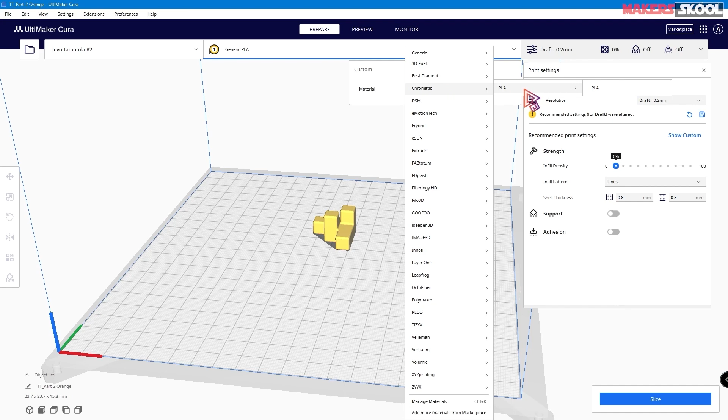If you have different colored filament, you can print all the different parts with different colors separately. So this is part 2, orange. You can slice it and save it to the disk as G-code, and do the same with each and every part, part 2 and part 3.

If you don't have filament of different colors, you can print it with the same color filament by opening each part separately one by one, slicing the part, seeing the preview before printing, and then saving it to disk as G-code.

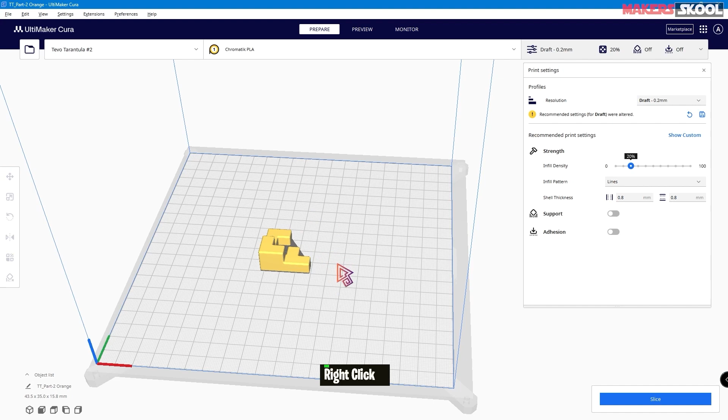So if you want to print part 1 and want to remove this part too, just click on it and hit delete selected. Click on it and hit delete selected, and it will remove the part. Now you can slice it and print it separately.

In this video we are going to create this part, 5, yellow. I want you to pause the video and think about how you are going to create this part.

As discussed earlier, you can create the parts similarly to how we created part 1, part 2 and part 3 - by creating the first bottom sketch, extruding it, creating a top sketch over here, extruding it again, and then adding the fillet. You can create it by this method, but in this video we are going to create this part using a different method, so let's understand some new concepts before moving on.

As discussed earlier, the extrude function can be used to create a solid component, but it is also used to remove or cut a component. If you drag the sketch below the solid component, you can see that the component has been cut out and removed from the solid part. That means the extrude function can be used both to create a solid part and to remove material. Now below you can see this is what is called a timeline.

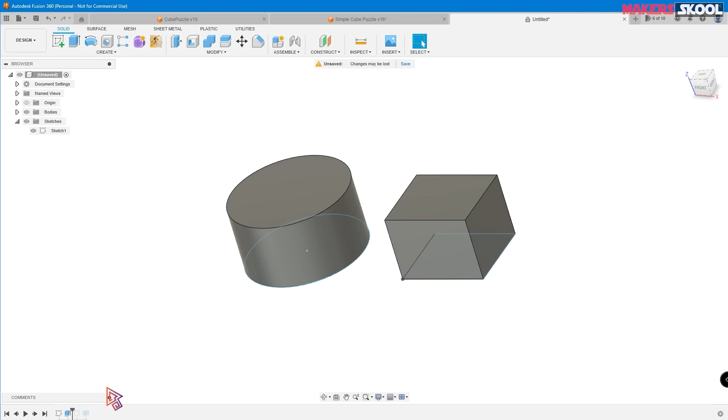Everything we have done is recorded over here - from the sketch we created to the extrude and sketch, everything has been recorded here. This is what is called a timeline, and this is the marker. You can roll back in the history and see that we first created a sketch, then created an extrude, then created another sketch, and then extruded it again. So this is what is called a timeline.

You can change or modify any of the design by right clicking on any function and then clicking on edit feature. If you want to change the extrude, you can do it from here and then click OK.

Similarly, if you want to change the sketch, right click on it, click edit feature, change the sketch, and then click finish sketch, and you can see the design will automatically modify itself.

So it's the timeline. You can modify any of the design that we have done in the past history, so you can easily modify the design if you want. It's a great feature for changing the design.

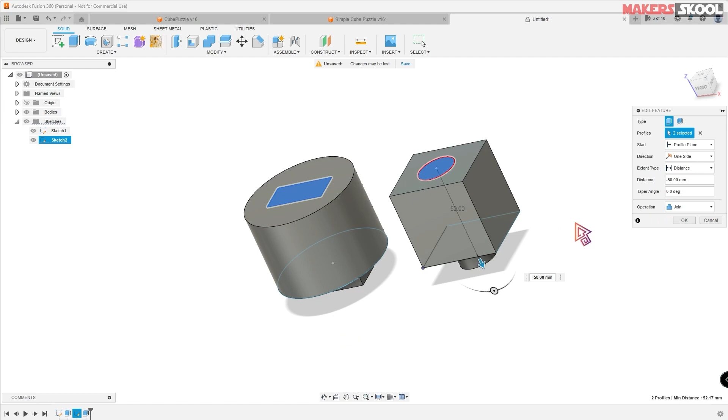You can see that the operation is at cut, which removes the component, but if you change the operation to join, then the cut will be converted to solid again. These two operations, join and cut, are the most common operations we use for the extrude function.

So using the concepts discussed earlier, the extrude and the extrude cut, we will create this part.

To create the part, open up the cube puzzle that we have created, part 1, part 2 and part 3, then select the cube puzzle, create the new component and name it part 5 yellow, and then hit enter.

To hide all of this at once, right click on part 5 yellow and then click isolate. It will automatically hide all the parts, part 1, 2 and 3.

Let's move on to creating the sketch. Click on create a sketch, go to home and then choose the bottom plane. Now open up the part 5 yellow PDF.

We are going to create both sketches all at once, the bottom sketch and the top sketch. Previously we created the bottom sketch differently and the top sketch on a different plane, but in this method we create both sketches all at once, so we don't have to create the top sketch later on. We can use this sketch to create both, so let's start creating both the top and bottom sketch together in a single plane.

Then create the rough sketch by choosing the line tool.

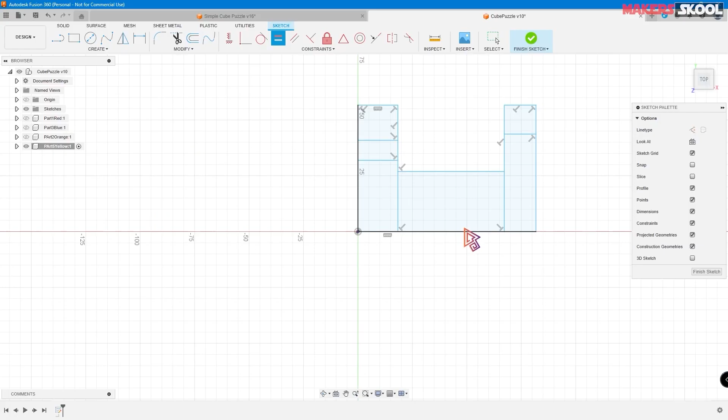Next we will use the equal constraint. We can see this length and this length are equal, and this length and this length are equal, meaning all three are equal. So we use the equal constraint here and here, and then between this and this. Similarly this length and this length are equal, so we use equal constraint between them.

Now we can dimension the sketch. Choose the dimension tool and dimension this 7.8, zoom in, then dimension this length 31.7, and then dimension this length 23.7.

To dimension this 8.1, choose this length and this length, and then dimension it. Similarly here, dimension by choosing the top length and this length, then dimension the 8. This length is also 7.8 since this is a square, so this 7.8 and this are also 7.8.

We can use equal constraint here also, but there is also one method to make something equal using the dimension tool. Just click on the length you want to make equal by selecting these two lengths, and then click on the dimension you want to make it. We want to make this 7.8 this length, so we click on this. If you want a different length, click on that particular dimension.

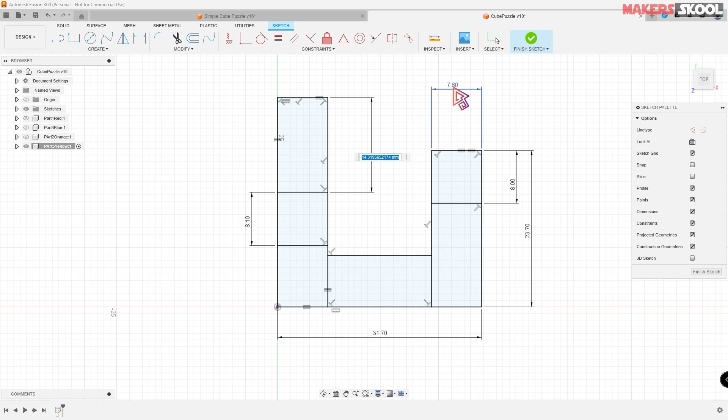If you click on 7.8, you can see it dimensions this, and when you hit enter, you can see it has become 7.8, meaning if you change this length, it will automatically change this length too, meaning this and this length are now related, or you can say equal. Now the sketch has fully turned black, meaning it has become fully constrained.

Now we can click finish sketch, then click on home view. Now we can extrude the sketch. We are going to extrude all the sketch till here, which is 15.8.

Select the extrude tool. You can select individual profiles one by one, or you can select all at once by holding down the left mouse button and then dragging it.

Select every profile, which is 6 total profiles. Now we can extrude it to 15.8 and then hit OK.

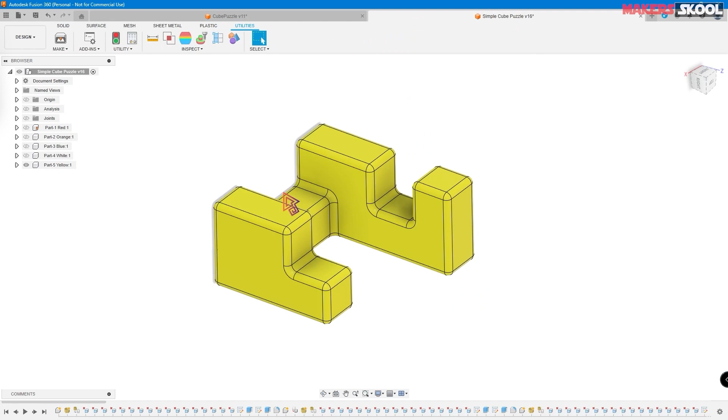After making the extrude, we have to make the cut in the part, just like these cuts. So we can create the sketch on top of here, or use the previous sketch we created. Click on the left side, click on part 5 yellow, click the arrow beside it, then click arrow beside sketch, and unhide the sketch. Now you can see the bottom sketch.

So we can use the bottom sketch to cut the part on top of here. To cut out the part, click on extrude and choose the profile we want to cut. We want to cut this and this profile that we have created, but we don't want the cut to start from this plane, we want it to start from the top of the plane. So in the start of the extrude, we will choose from object, and then choose the plane we want to start the sketch from.

We want the sketch to start from this plane. Now we can drag it down to make the cut, and make it -8. Now click on OK. You can see we have created the cut edge here.

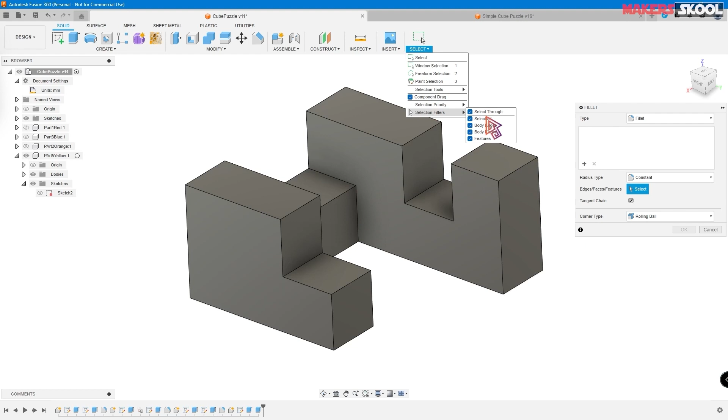Only thing left is to fillet the edges. So we can fillet the edges, go to select, then selection filter, select all body edges and drag it to select all the edges, then apply 1 millimeter of fillet, and click on OK.

The next thing is appearance. Right click on part 5 yellow and click on appearance, then duplicate any of the colors in design. Click on it and click duplicate. After duplicating it, click on it and click edit, then change the color to yellow, and click done. Then drag the yellow color over the part and click close.

Now you can save the part. We have created part 5 yellow. The next thing is creating part 4 white.

This is the homework you have to create. You can create it by the method given here, extruding and then cutting as discussed in this video, or use the method discussed previously for creating the previous part. Create every part and print out part 1 to part 5. In the next video we will assemble part 1 to part 5 into the puzzle.

In this video we will do assembly of project 1, the cube puzzle. Hope you have created part 4 given in homework in the last video and printed out all the parts through Cura using the settings discussed earlier. So this is how my parts turned out, from part 1 to part 5.

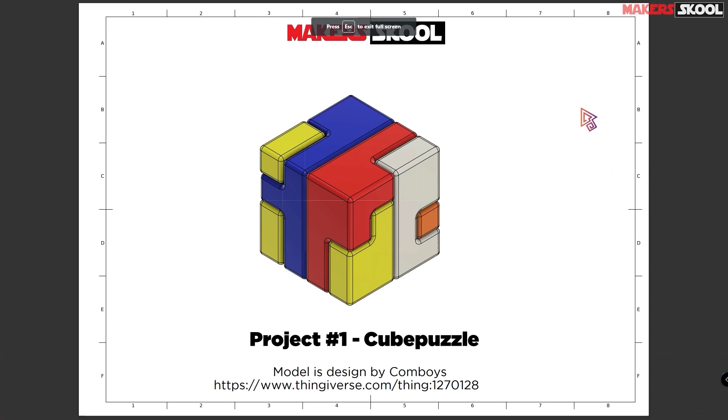Let's do assembly. Open up the drawing PDF and go to the last assembly page of project 1. Using the help of the assembly photo, we will assemble the puzzle.

Let's get started, starting with the yellow part. Let's first align this according to the PDF. Then the blue part, align this similarly and join it with the yellow part as shown.

Then move on to white and yellow. Align this similarly as in the PDF and join it together. Then join the white and orange, and yellow and blue together as shown. Then the last one, red, align this, then join this too.

So we get our first project completed, the cube puzzle. Hope you enjoyed learning by building. In a similar way, we will make many fun projects step by step, creating from simple to complex ones, while learning Fusion 360 concepts along the way in the coming videos. So have a great day.